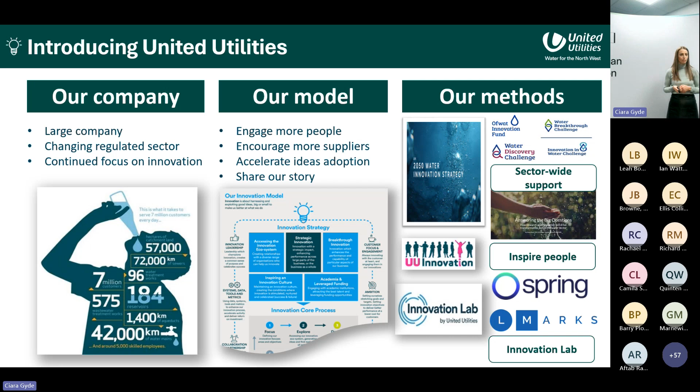And then finally, just around open innovation and how that brings benefits - we talked earlier around how we've been finding and persuading people to bring forward their ideas, and we've done that through some different methods. We like to broker it and test these things, and you'll hear around how we've been de-risking these solutions for the sector.

Very much the focus of the Water Industry Printfrastructure project is how we can adopt these solutions, and you'll hear today how we're pushing these into operational environments, and that was the main purpose of this project. Sharing and endorsing - that's exactly why we're here today, to provide this knowledge share to the sector and to other sectors too, and to showcase how we've driven this 3D printing attitude, and this mindset of can we do things differently, can we build and maintain things differently for United Utilities and for all the partners and all of our cross-sector collaboration.

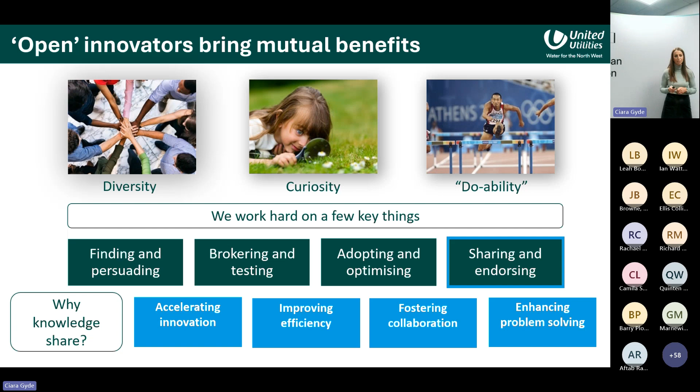I'm going to hand over to Richard now, I think, to introduce the project properly.

I'm Richard Clarke, Programme Manager for Engineering Innovation here at United Utilities.

The story around Water Industry Printfrastructure, or WIP for short, started for me around 4 years ago, when Changemaker 3D came to us through the Innovation Lab, which focuses on helping SMEs come into the water industry and understand how their technology can work with us, but also understand what they need to do to really get a foothold within our industry. So that's where it started for us.

Changemaker 3D came to us with the idea of 3D concrete printing, and we took that further and asked, what does that mean, how will that work? So we printed the first water retaining structure - we printed a tank in that first phase of 3D printing, and that worked for us. We saw something in that we could take further.

Just around the same time, Manchester Metropolitan University came on with their PrintCity function, and they said to us, have you thought about 3D plastics printing and what we could do within your industry with that? We thought, okay, that's an interesting concept as well, so we started talking to them about the possibilities.

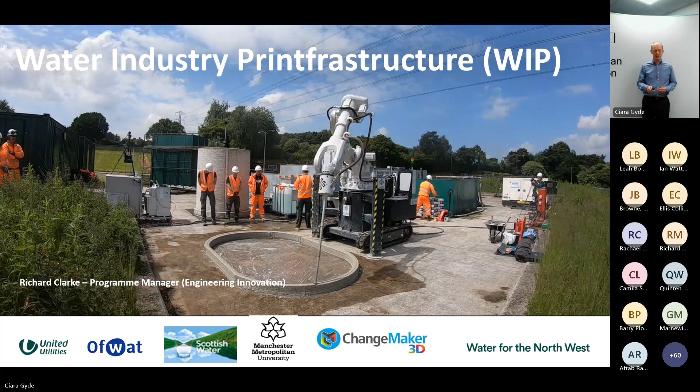There we go. So on to the next slide - what we're trying to do, why our proposal was successful.

We're looking at new ways of working. We know that going forward into AMP8, there's going to be more work for us to do across the water industry, more pull on our traditional resources. Whether we're talking about mechanical engineering, electrical engineering, civil engineering and process, we know we have those traditional mindsets, those traditional disciplines to help us achieve what's a much larger challenge for us going forward over the next 5 to 10 years.

But this 3D printing approach really does help us add more to that, helps us enhance that, moves us forward, bringing new skills into our industry. Whether it's computer modelling or actually operating 3D printing systems, they're all things that we can add on and enhance what we do across the industry and help us achieve that much larger challenge.

So we're looking at how we do that. We're looking at new materials as well, how we go about using alternative forms of mortar and concrete in our 3D printing and concrete printing activities. We're also looking at how we use different types of plastics within our 3D plastic printing.

And it's about how we not just look at our infrastructure and how we're going to help our capital programme deliver, it's also about our operational functions as well. Are there things we can do to help our operators out on our existing water and wastewater sites? How can we help our technicians within our laboratories with what we're doing with them? Are there things we can be printing for them, to make our lives more straightforward, making it a more efficient delivery across our whole sector?

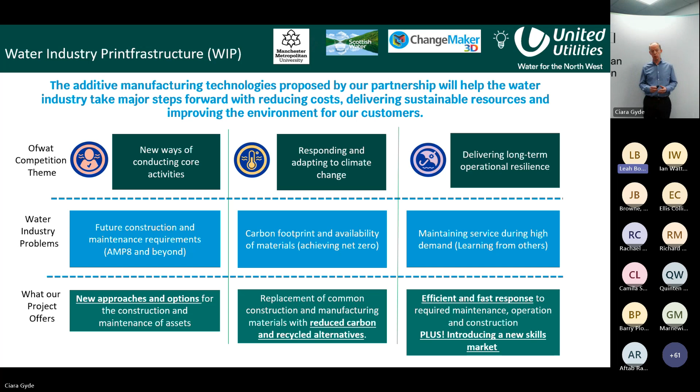Our project was broken down into 2 work packages. So we have work package 1, our 3D concrete printing package, and this is what we did at Wigan.

Some of you were lucky enough to come along to see us at the end of May, early June this year, to take a look at our hub, our printing hub at Wigan Wastewater Treatment Works, where we had a couple of weeks where we printed a whole range of different items, which Natalie will take you through in a little while.

We also moved our robot over to Weaverham Wastewater Treatment Works to see what it was like to actually print in situ on the works. So we moved the robot into place to see what kind of challenges came about through printing in situ.

In work package 2, we looked at 3D plastic printing. PrintCity helped us understand what we could do from printing existing items or bespoke design items, and see how we could use 3D plastics printing technology across our whole business. That came up with a few really good examples where we can massively reduce carbon in the things we do, but also how we can make bespoke items for ourselves that really achieve what we need through our operational resources.

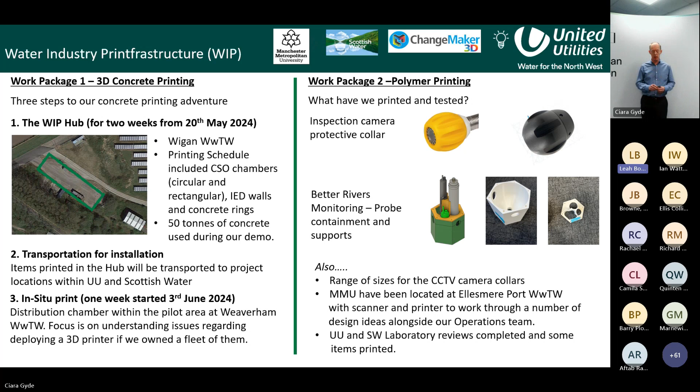Just staying with 3D concrete printing for a second. There were a few decisions we needed to make along the way to fit our project within our thresholds. We needed to decide what it was we wanted to do. One option was the type of robot we could use. We could look at gantry robots, which would suit us if we were staying in one place for a long time printing a whole host of items. However, the gantry robot is hard to move between sites, and we wanted that flexibility. So we went with the tracked robot option, meaning we could move between sites and see the impact of different operational conditions.

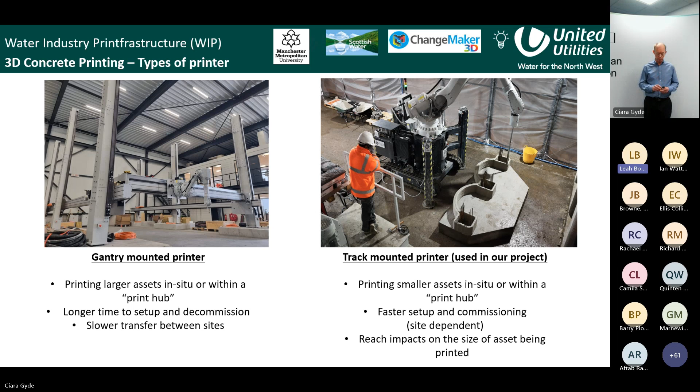Another thing we needed to think about was whether we wanted a print hub model or an in situ model. When we talk about a print hub, we mean maybe a temporary building - in our case we actually used a temporary tent, a posh tent, a big posh tent - or spare building available on site. We looked at that model where we could print a whole host of different items, not just for ourselves. We actually printed some stuff for Sellafield as well whilst we were in our hub model, to understand how that manufacturing process worked.

We also thought, well, do we want to do in situ printing? And we did. We decided to do both because we wanted to understand the ownership issue around having robots actually available, a fleet of robots. What happens if we turn up on a site, print Monday to Friday, and on Friday afternoon pack up that equipment and move to another site?

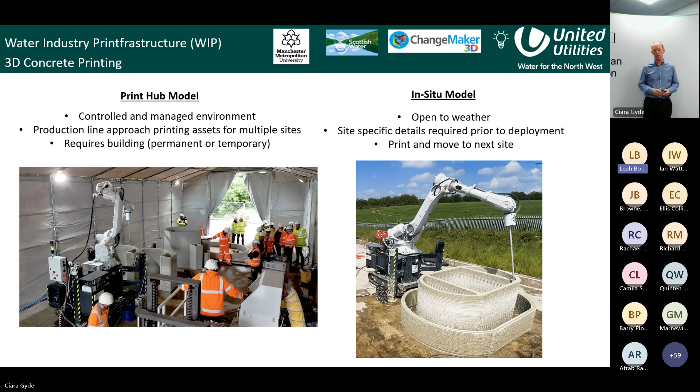Can we really, from Friday afternoon, be printing again Monday morning on that next site? What is the impact of weather? Can we print at low temperatures? Can we print at high temperatures? What happens if it suddenly comes down with rain? We wanted to understand all of these different elements for the water industry, so we can share that information with you if you want to pick up this technology at your own sites. Over the next few months we'll start publishing more information around our findings to help you take this technology on board and think about where you could use it.

There are a few things on 3D concrete printing that we certainly learned throughout our period with the robot. We learned that we can't move away from certain things - the design element will always be there. We're not able to put the design to one side; we have to do those key structural and civil engineering designs.

We had to learn a lot about site management and how we move around the site, particularly with the hub model at Wigan. We needed to understand where we were going to put things, where we were going to print things, how soon, and how long we leave those printed items in place before moving them aside to print something else. There was a lot of logistics we needed to think about around the whole hub model.

It was a real key piece of learning for us, and Natalie will go into that a little bit more shortly, but it was key for you to understand that if you're going to take up this technology, it's a logistical planning exercise - which fortunately we had some really good help with throughout the project.

Something else to think about if you're considering a hub model or taking this particular technology on: think about how visitors are going to move around your site, how you're going to keep everybody safe, and making sure everybody enjoys their visit.

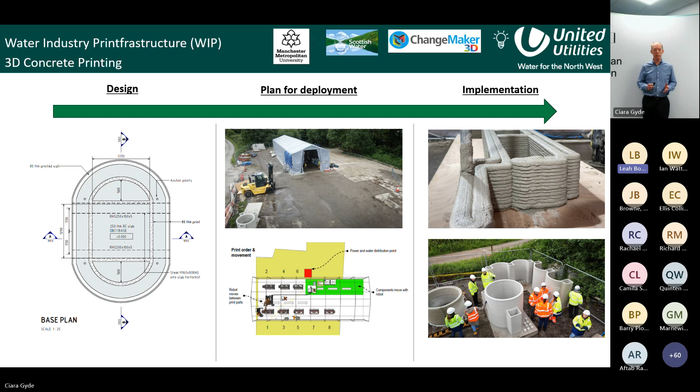So think about what the next steps are for all of these assets that you're printing. They can't stay at your printer's hub site - they need to move on, they need to be utilised. That was a key element of our project, to make sure we operationalised what we printed, making sure we really did have a use for these items at a later stage.

Just finally from me, I wanted to talk a little bit about the power of 3D plastic printing, because it was a massive surprise to me and our project team exactly what capability is available within this field. A few of you will be sat there saying, well, 3D plastic printing has been around for a while - there's hobbyists out there with 3D printers in their homes doing this all the time, and you'd be absolutely correct to say that there is. But honestly, I didn't realise how big a deal this was before we went to see Alan and the team at PrintCity, and the number of options that are open to us.

I'd strongly recommend getting in touch with PrintCity and trying to understand if they can help you with the different aspects you're looking at within your businesses, because they really do have a whole range of different printers available, different materials they can print in - it's not just plastics, there's metals as well. It really did open our eyes to the art of the possible when we went over to PrintCity. Strongly recommend getting in touch with them - it's not just the printing, it's their scanning technology and design capability as well. It really did help us on the route to delivering a successful project.

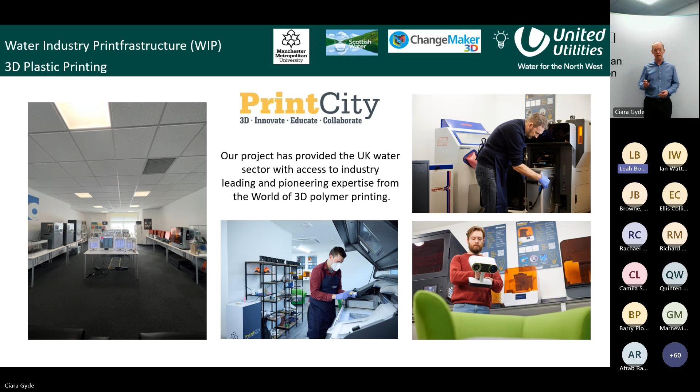We're delighted to be part of this really groundbreaking project. As a startup that has been working in the water industry now for 3 or 4 years, as you've heard from Lisa and Richard, our journey has come through the UU Innovation Lab, and we've been able to find out more about the water industry and where 3D concrete printing can add value, but also where we can knowledge share with our rail and nuclear clients, and help de-risk cross-sector. For us, this has been the most informative and advanced stage of our journey in the water industry, and being able to share that with yourselves this morning is going to be great in terms of getting some of your feedback and questions as we go through as well.

So I think we've heard really from Lisa and Richard that the water industry needs to do something different. It needs to go above and beyond the traditional delivery method to ensure that AMP8 can be fully delivered.

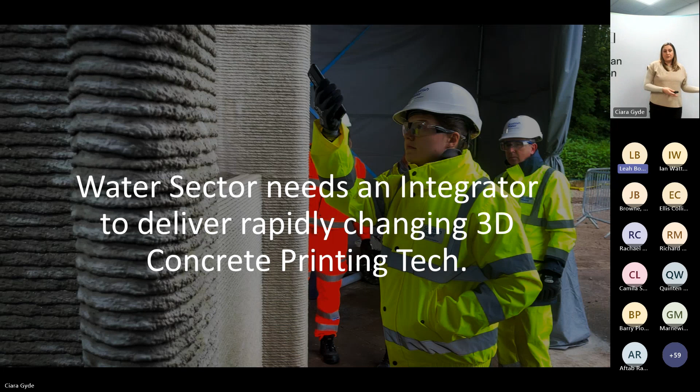And for us, we want to be part of that solution as an integrator of 3D concrete printing, being able to work with our 3D print supply chain partners like CyBe Construction, in this project, and making sure that we bring the technology from innovation into real world application. That's through design and through the print process. That's where we're driving through that value.

And then we're able to innovate with the range of materials. So whether it's the CyBe mortar, whether it's adding graphene, we've been able to do innovation around the material for the benefit of the water industry as well.

And then moving that through into integration. So what does that mean? Well, you've heard from Richard that there's different ways that we can operate with 3D concrete printing. Is it on-site in a Printfrastructure hub? Is it off-site? Where is it in situ? There's 3 delivery models. Each are tailored per site, and each will have its own criteria of benefit when you're considering which is the best for your programme.

We know that within a print hub we can have almost like an on-site manufacturing process, but there does need to be value in that. You're not going to turn up for sort of one manhole ring to do that. It's going to be integrated into a larger programme. Equally, being able to print something in situ and take the robot to the final point that the product is being printed, that can unlock value as well in a programme.

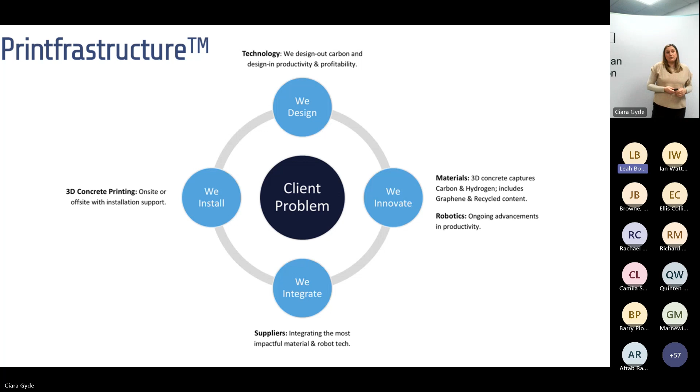And all within this, wrapping around it a skills framework, which we're developing in collaboration with industry to take out into 2025, because we see that these skills are very much part of the future for not just the water industry, but construction as a whole. And we see it very much as part of our role to embed that social value into everything that we're doing.

So you've heard from all of us this morning that this is a UK first. It was the first opportunity for us to get out onto a water site and to be able to set up our print hub there. We had support from Costain within the enabling works and within some of the facilitation of getting us onto site as well, so that we could also work with some of the framework partners for UU.

We've done an awful lot. We've done far more than we thought we could when we set out. We've really pushed ourselves and all the partners to deliver value and learning within this project. So what does that look like? Well, we've designed 5 products, and I'll tell you a little bit more about those as we go through.

We also designed 12 variations of base slab. They all had important design roles, not just for the structural performance, but also the way that we install and the way that the product then integrates with the traditional items around it as well.

We've demonstrated that we can go from a lorry to printing in 1.5 hours. We had our delivery partners, CyBe Construction, on site with us throughout the programme, and they brought their expertise in at that point to demonstrate how we need to take on this technology as Changemaker 3D as we go forward when we scale up and own our own printers. They showed us how we can optimise deploying the technology out into print hubs up and down the water programmes.

So that was impressive. That was fantastic to see that we can have a print capability turn up on site and within an hour and a half you're plugged into water and power, and you're actually doing your first test print. That enabled us to print 23 products in the hub.

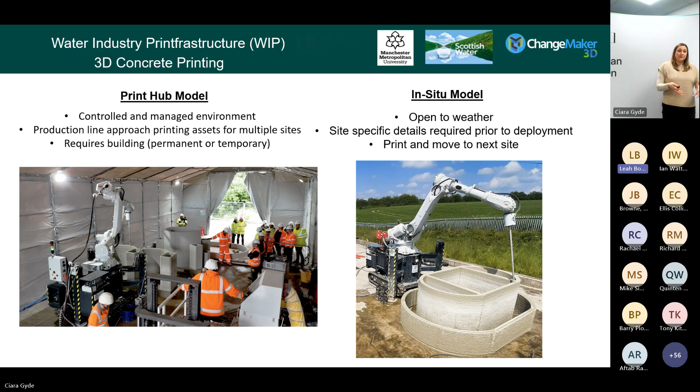What are the benefits? What are the space constraints? What are the power resources we need there? How quickly can we deploy? Again, we took the learning - there were some areas that we know we can speed up on, around transport, loading, unloading. But actually, when you get the robot into position, it can be really consistent in the fact that it can print the design that it's been programmed to.

And there's a little bit there about the particular Cybe robot. It's a mobile robot which again for us has proven very, very agile and flexible, both on site and off site, and in different sectors where we've worked with HS2 as well. So understanding that this is something that can go across multiple live sites.

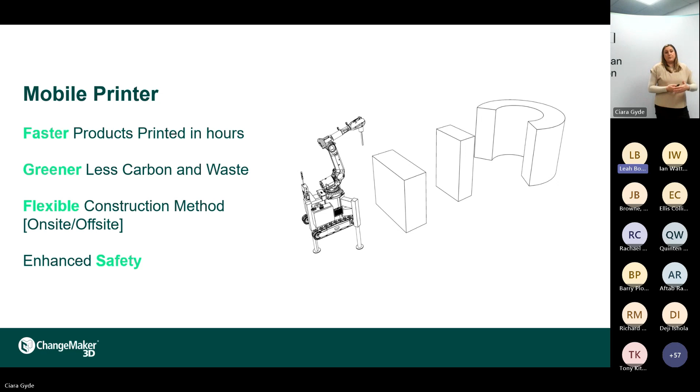It is very fast in its ability to be set up and print - you're looking at speeds of about 0.5 metres a second, with the material setting in about 3 minutes from the point of mixing to the point of extruding. So the speed is something that strikes everybody, whether they're in person or watching for the first time on video - they can stand with us in a print hub for an hour and see a CSO chamber, an IED wall, or a manhole ring be produced in front of them.

There's a little snapshot here of the material science. I know this is an area we end up having a lot of good debate on, so if you have questions about it, feel free to put them in the chat and we can look to answer those. But essentially, it's a mortar that we've used, and you can see some of the performances and also some of the groups it is defined under. We typically design for a C30 lower carbon property, and we've been able to demonstrate with cube testing and on-site testing that we're consistently overachieving those performances in terms of strength.

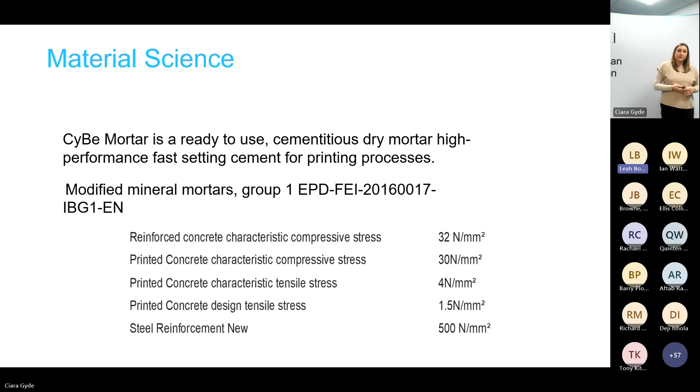The challenge we wanted to bring together from a design perspective was firstly to reduce carbon, and to go about that through really focusing on the benefits of the free form of 3D concrete printing. You can see in those images you really can design differently, thinking fundamentally differently from the beginning about how the product is constructed. With the speed and efficiency of the robot, we've got productivity gains that layer up on the overall value add for the technology.

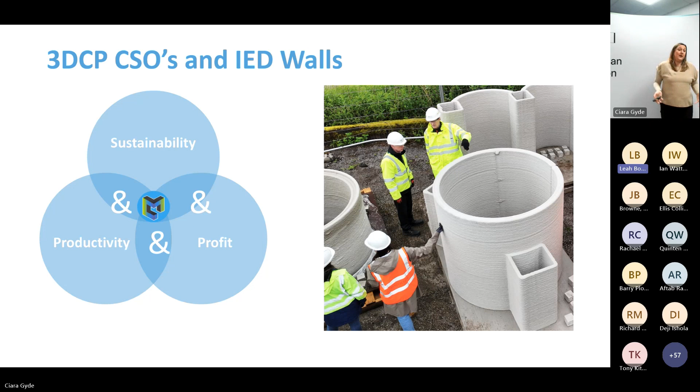You can see there the circular CSO. When we talked to Scottish Water and UU, we wanted to understand what some of the key products could be for AMP8. CSOs are very front and centre for a lot of the water companies, and UU and Scottish Water are no different. Being able to show something standardised in a circular format was something we felt would add value. You can see we've relied on the 3D printed material first and foremost, and then reinforced it specifically where needed.

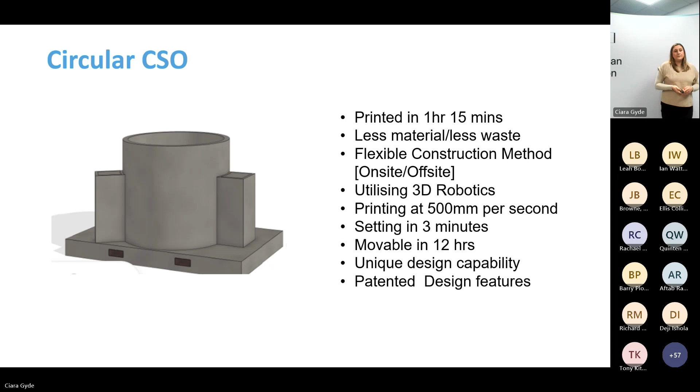We've also talked about the IED walls, which are very topical at the moment, looking at ways to support the sewage works that water companies have in place. There's a large programme for IED walls being developed as we've gone through the project. We wanted to show something that really played to the strengths of 3D printing, like the arched wall there, which we'd all agree we wouldn't easily get in a standard or traditional method. The traditional alternative could be something like a legato block.

We were able to print these walls with design strengths for a permanent structure that would allow for fairly strong water forces, and that had to hold containment for 8 days - that was our design brief. You may be able to see a snapshot of some of the cube tests at 15 days, just to show that the material is overperforming as per our design expectations.

This is an example where you'd have one of those walls compared to maybe 4 to 6 legato blocks that would have to be installed and grouted on site. So we're taking steps out of the installation process by having one wall to deal with rather than between 4 and 6. These walls are also showing good signs in terms of carbon reduction.

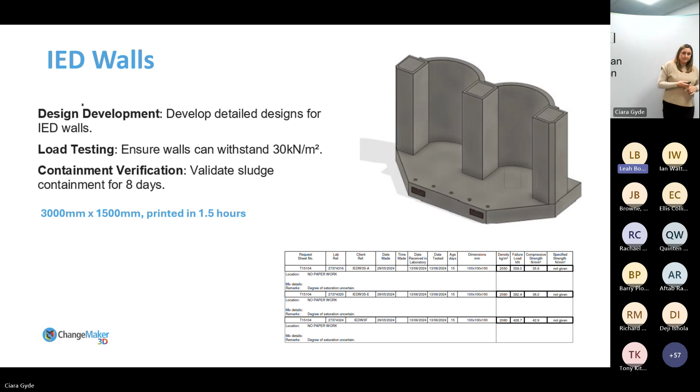We took on a modular challenge with Scottish Water, taking learning from our HS2 walls, which were also modular retaining walls, but took this forward into a rectangular CSO. It's the largest product we've designed, and arguably the most complex in terms of modular and putting it back together. You can see we've been able to configure walls in a shape you wouldn't do traditionally, but can be done very efficiently with concrete printing, placing material exactly where it's needed - reducing waste, reducing over engineering, and being very efficient with material application.

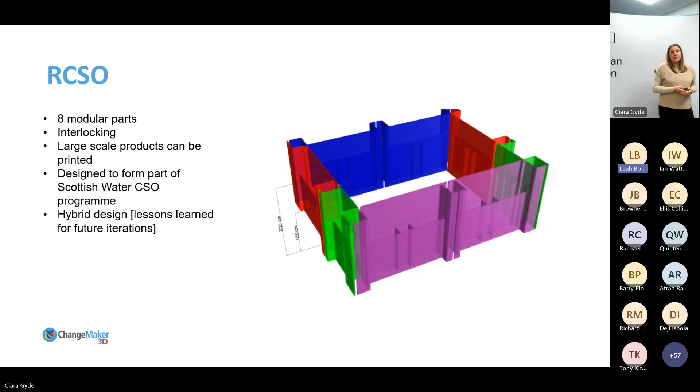We've taken an awful lot of learning from these walls. We'll evolve the design for the next iteration and evolve the way we'd go about installing as well. For the purpose of this particular stage of the project, it's given us a lot of insight into how we would print something that's ultimately going below ground - thinking about the above and below ground challenges, we've taken all of that on into the project as well.

You will have seen on the previous picture the in situ printed distribution chamber. This is the design we collectively worked on within the project. We wanted to show something slightly different, in more of an oval shape, and also to show that you can 3D print the internal dividers as well.

This was printed as one structure, taking inspiration from the original water distribution chamber we printed, which we were also able to print as one entire structure. Again, this saves time and takes steps out of the process, in this case reducing the need for people to go back into a chamber. You can see we put a ring beam around the outside, thinking about where the forces are on the chamber and being very specific about where we put the material. This took about 2.5 hours to actually print on site.

It takes about 20 minutes to half an hour to get the printer going and do the dry run, what we call a dry run, where the printer calibrates its route. That's where the print team are doing their quality checks, making sure the nozzle on the robot is placed as per the design. So there's a lot of quality assurance that happens even before the print starts, and then throughout the print process as well.

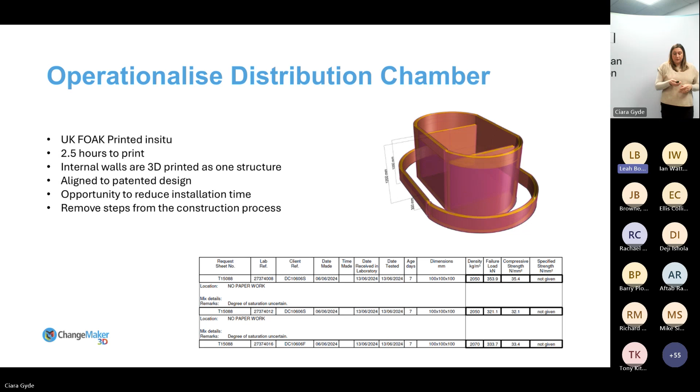We were also given the challenge to do a manhole ring, which at the time was almost just an add-on. We thought we'll look at manhole rings, not necessarily anticipating there'd be value or lots of data around it, just that if there was a supply chain issue we wanted to support it with quick access to a standard, regularly used product. But going through the manhole process, we learned there are benefits to be gained through concrete printing, both in the speed at which we can support the supply chain.

These manhole rings are printed within about an hour and 15 minutes, and can be deployable within 3 to 5 days, but also comparable on cost and carbon. This was one of the products that took us all a bit by surprise - yes it's very simple, but it's standardized, and it's something the technology can help to keep the supply chain moving when large volumes of orders inevitably come through.

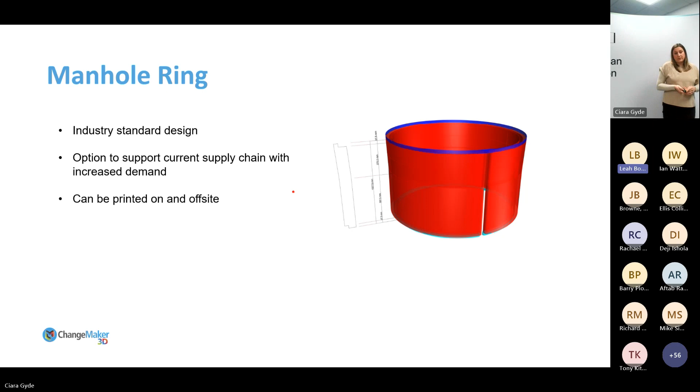We also had the opportunity, thanks to you for enabling Sellafield to come to the Wigan site and see their first 3D concrete printed box in person. It was fantastic having two large organisations in the northwest of England, both committed to looking at the technology and supporting carbon reduction and innovation around it. They talked from a customer perspective about their respective interest in the technology, and we felt privileged to enable that joint learning.

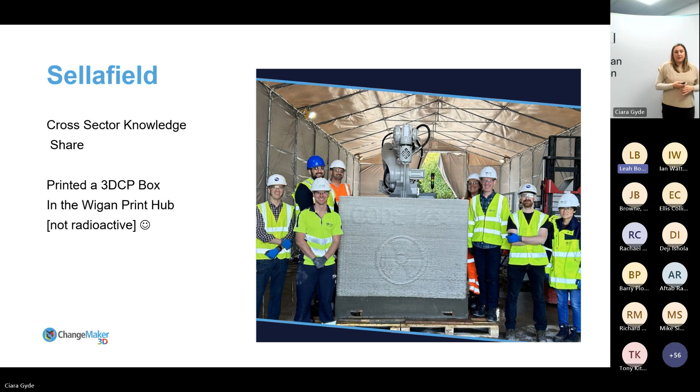Just to note the nuclear box, whilst it has a nuclear sign on it, is not radioactive - we're all safe in the zone. They wanted to put numbers and images into the facade, something we didn't do on the remainder of the project products, but it's a great example of how you could code a particular box, for example. So good learning for everybody and good collaboration.

A large part of what we've done is making sure there's a level of rigour in any of the products going out to be deployed into the programme, with an anticipated minimum 50-year life, and making sure that because they're all permanent structures, that is taken very much front and centre for how these products can then be utilised in AMP8.

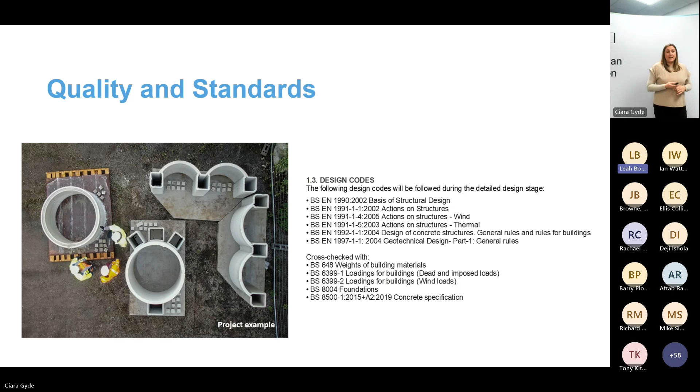So we did learn an awful lot, as we thought we would. We definitely learned how to optimise modular design. That was one of the key things we wanted to understand: if we have a larger structure and want to really get into that modular off-site or on-site offering, how do we approach that from design, but also on install. We're not just focused on the printing of the product, but the end-to-end operational delivery, our interface with the main contractor and the design teams.

I think also the interface with traditional products. We know that the 3D concrete printed structures are going to have pipework within them, going to be part of a larger network. They may even go directly up against a standard concrete structure, a standard description. So what do we need to do there to make sure the integrity of both those structures remains as per design?

And the workflow in the print hub, that was a key point for us as well. Three to five products per day is a good place to be from a production point of view. It allows for a steady workflow, but what could we do if we had a larger space? What could we do with two robots operating in conjunction with each other, or a night shift? There's all sorts of things there about getting into that lean manufacturing type thinking, blending manufacturing and construction, which the technology allows you to do.

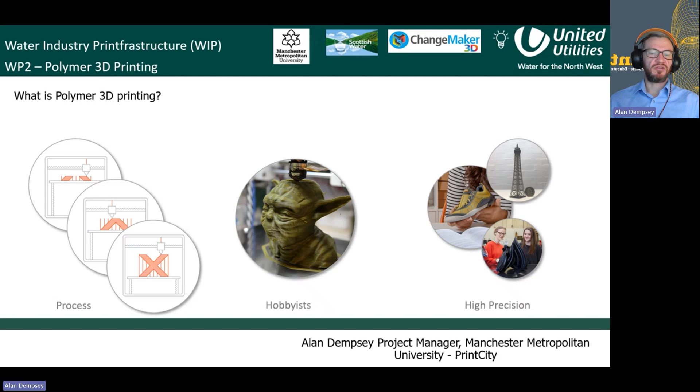In my experience, many people perceive polymer 3D printing to produce low quality parts that have visible layer lines, often used by hobbyists. However, the technology is being used in virtually every sector and is a key component in high value manufacturing. Many people have seen 3D printing online, and for those that have, it's usually fused filament fabrication, or filament 3D printing.

There are 7 types of 3D printing, dozens of subcategories, enabling thousands of materials to be used. At PrintCity, we've got over 80 3D printers. 9 subcategories of 3D printing technologies were available to the WIP project.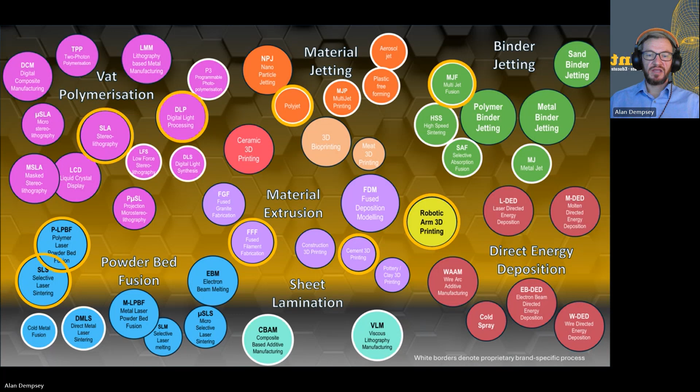The benefit of working with an academic partner on Work Package 2 means the WIP project had access to a variety of technologies available in PrintCity, as well as specialist academic knowledge in 3D scanning, 3D design, and 3D printing. At PrintCity, we've worked with hundreds of companies over the last few years to investigate if 3D printing can add value to their business by helping them develop new products, services, and processes. We offer specialist advice to identify if 3D printing can add value, help select the right technology and material, and manufacture parts for them to test.

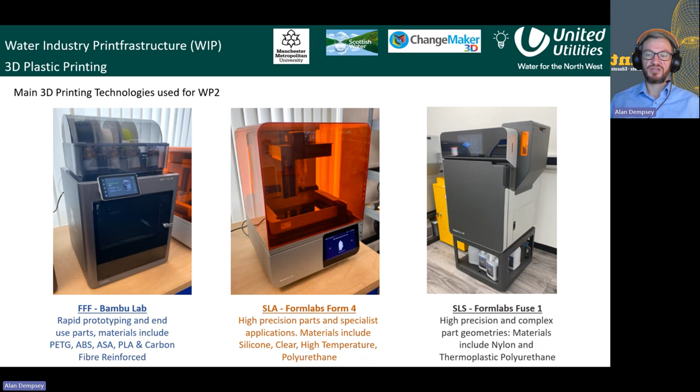The final image on the right is 3D powder printing, and the technology is called selective laser sintering. It fuses polymer powders together with a laser, one layer at a time. The technology is used to produce high precision parts with complex geometries. There are fewer materials available with this technology, but we can print in both rigid and flexible materials.

The first and one of the most comprehensive tasks in Work Package 2 was to identify suitable parts to design and make. It was really important to select parts that would benefit from utilising polymer 3D printing. Essentially, we're trying to answer a number of questions to select the most impactful parts to design and make.

The part selection process happened in 4 stages. In the first stage, we conducted a series of online workshops with key operational teams, outlining what polymer 3D printing is, what materials are available, and why it could and should be used. We then asked the stakeholders to identify what parts we could focus on within their operations. Over 50 parts were discussed and reviewed during this workshop.

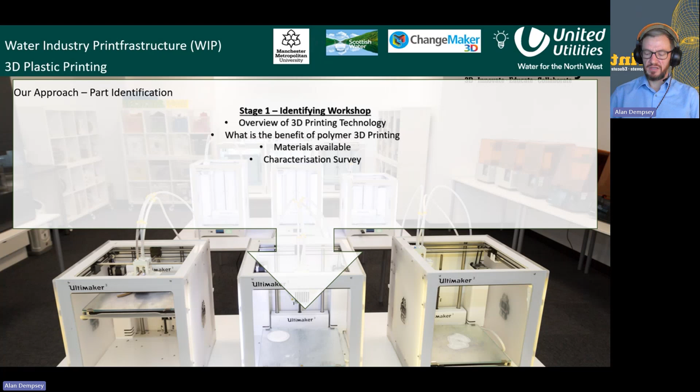In the second stage, we invited some of the operational teams into PrintCity to show them the technology and some of the 3D printed samples available. This gave them the opportunity to review previous samples and look at the benefits and limitations of each technology. One benefit from visiting PrintCity was that users could see some of the size limitations and discount some of the parts they were thinking of because they were just too big for polymer 3D printing with the equipment available. Various teams visited PrintCity over a number of weeks to discuss their activities, what those parts do, what environment they operate in, and how many they would typically need, giving us the opportunity to have an informal consultation about individual parts and their suitability for 3D printing.

The third stage involved the PrintCity team visiting various wastewater treatment sites to identify and discuss the benefits of polymer 3D printing. Myself and our technical specialist, Nick Hurst, visited a number of United Utilities wastewater sites and labs at both United Utilities and Scottish Water. We met with the site teams, walked through the various processes, and investigated the opportunities and benefits for polymer 3D printing for a variety of parts.

After the 3 stages were complete, the project team reviewed all the identified parts, scoring them on a matrix that looked at the printability, materials, volume needed, lead times of the traditional parts and suppliers, the impact of using polymer 3D printing, and opportunities to enhance the design of those parts, to name but a few.

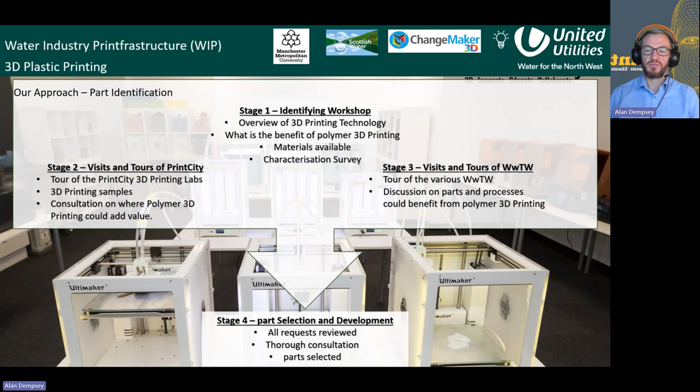And once we'd selected those parts, we moved over to the implementation phase. We worked with the stakeholders to design and manufacture those parts.

The first stage in the polymer 3D printing workflow is to create a 3D model of the part. For Work Package 2, we did this in a couple of ways for each part. In some cases, 3D scanners were used to capture the data or scan the environment that those parts need to fit into. We've got a large range of 3D scanners available in PrintCity, both structured light and laser-based scanning.

But not all of the parts needed to be scanned. Some of the simpler geometries were just measured and then designed from scratch in computer-aided design software to produce a 3D model. Once we had a 3D model, we sliced it in the 3D printing software. This produces instructions for the 3D printer to follow. And finally, we printed the part.

The printed parts were given to the stakeholders for feedback and testing. We tried to be as flexible as possible here by getting feedback by either visiting the wastewater sites, inviting those users back to PrintCity, or having another online meeting.

Some of the parts only needed one version to be designed and printed, but others, particularly the more complex parts, needed design changes and a second or third version to be made. We went through an iterative process of feedback, design changes, reprinting and retesting until the users were happy that the 3D printed part was fit for purpose. No parts went through more than 3 design iterations.

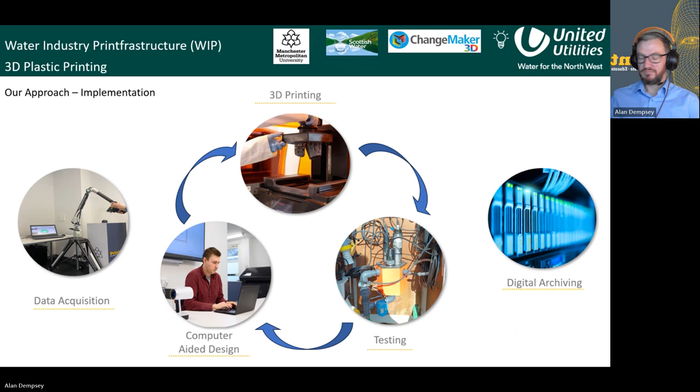We worked with the sensors and instrumentation team and one of the suppliers to redesign the trough and lid using 3D printing. The trough and the lid are part of a wider system where water samples are pumped from the river and an arrangement of sensors take readings to measure the water quality.

The lid was designed around the specific arrangement of sensors. The sensors were measured and the lid was designed to fit their unique profile.

The trough is intended to contain river water for the sensors to take the readings. The trough design factored in the shape, volume, the depth, how the water would flow through, and had design features such as allowing a tap connector at the bottom so the operational teams could flush the system and remove any solids during routine maintenance. The first version was trialled in workshop conditions for form, fit and function.

Feedback from the users led to design modifications, and a second version is currently being trialled at a live site. One of the benefits of using 3D printing for this part was that it enabled the design to be printed within a single day, tested, and for us to receive feedback within a few days. This led to the design changes and an updated version in a short time frame.

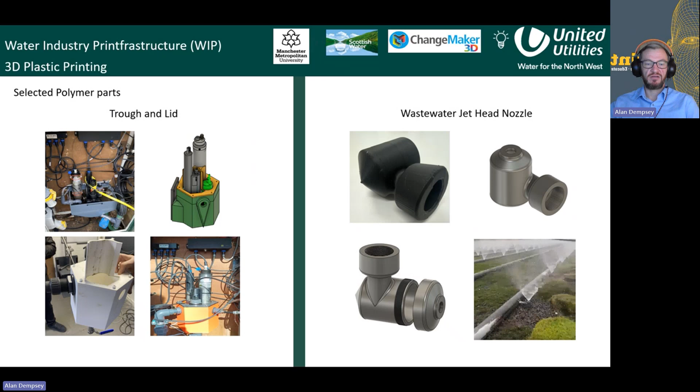There were in excess of around 75 parts identified through the identification stages. Over 20 of these parts were taken forward to the design and prototyping phase, but not all of them were successful. Some of the parts failed during the testing phase. It could have been materials, or it could have been the environment that they were operating in. But 13 of these parts were designed, printed, tested, and we've had positive feedback off the users.

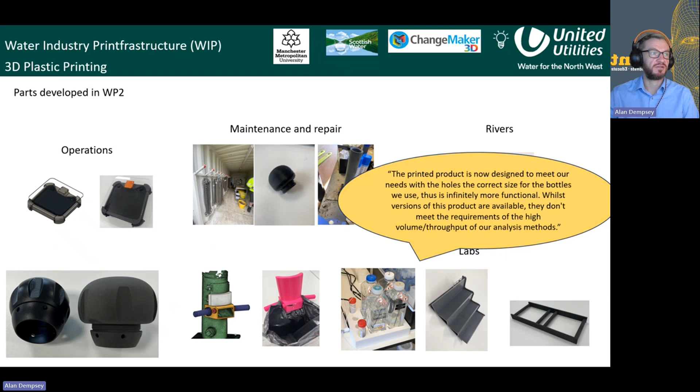So, delivering work package 2 wasn't without its challenges. If we were to repeat the project again, I think there would have been merit in adapting the approach to identifying the parts. The stage 1 workshops were good, as it was an efficient way to get a lot of stakeholders together. However, to introduce 3D printing to those with limited or no knowledge, explain the differences in the technology, how the technology could be used for a variety of parts, I think there was too much to take in a single workshop or a series of workshops.

I found that both inviting the operations teams into PrintCity and for us to visit the wastewater sites in stage 2 and 3 was a more efficient way of identifying suitable assets to design and make.

I think if we were to do the project again, we would likely base a member of our team at the wastewater sites during the testing and feedback stage. This would have been a more efficient way to review each part's performance and function, and would have made the redesign process a little more efficient. We could have sped up that iterative process.

There were a lot of lessons learned in work package 2. Legacy or obsolete parts, and those with a long lead time, presented some of the best opportunities for polymer 3D printing. Even if the 3D printed part was just used to bridge the gap while a traditional part was sourced, I think 3D printing can offer a lot of value there.